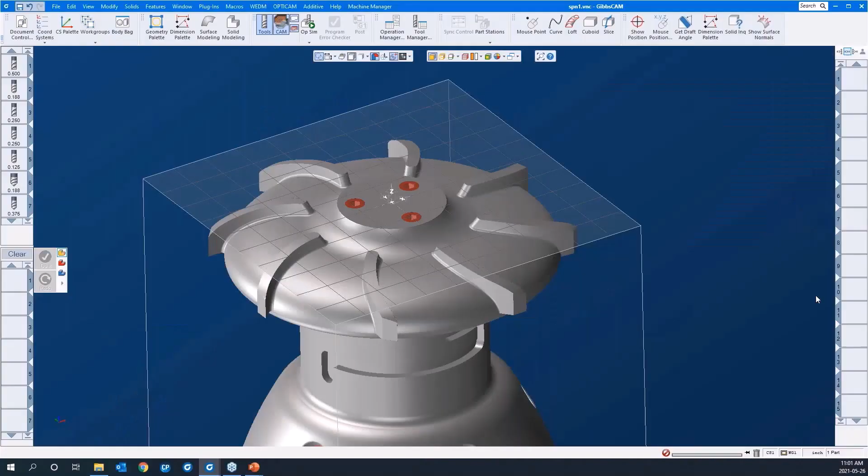Okay, let's get started. We're going to be looking at the 5-axis module today for simultaneous machining in GibbsCAM.

Let's open up a 5-axis process to start. Before I create a toolpath, we'll just look at the process dialog for the 5-axis module.

This is the options tab. It has your speeds and feeds, and you can duplicate and rotate toolpaths, which CS you're going to be machining in. GibbsCAM 5-axis supports 3D cutter radius compensation, so you can adjust the toolpath at the machine for size.

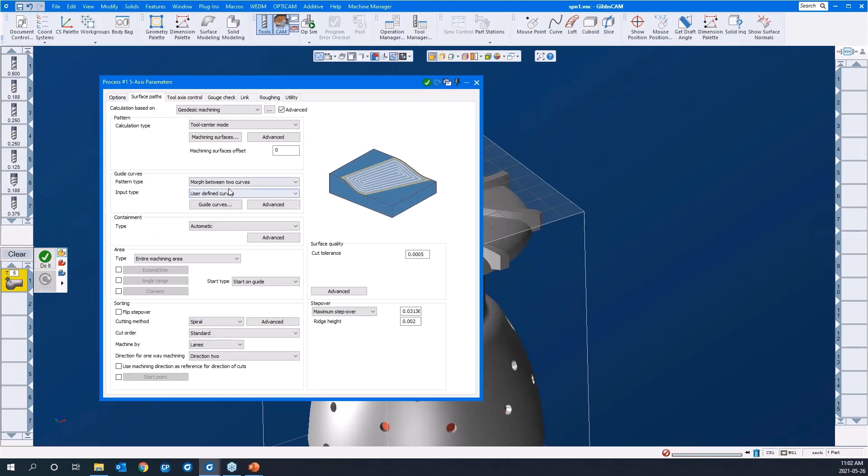If I click on the surface paths, you'll see that GibbsCAM is very graphical in the 5-axis module. Any field I click on, a diagram appears to let you know what the system is expecting. And that's right across the board, almost any field you click on. So it's very graphical, and it's a joy to use.

Okay, you'll notice I'm in tool axis control, and we'll be machining in full 5-axis simultaneous. There's also, you can go 4-axis simultaneous, or you can lock both rotary axes and machine in 3-axis as well, in XYZ. So we'll be looking at that as well.

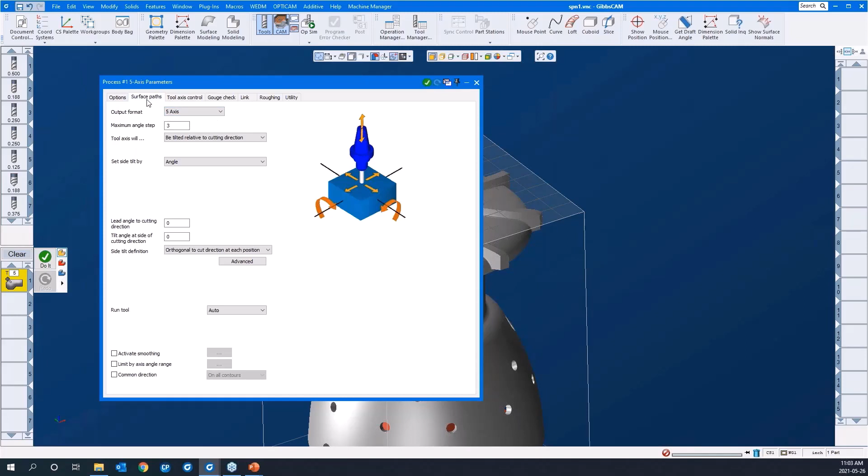There's a lot of power to the 5-axis simultaneous machining strategy in GibbsCAM, and a lot of depth to it. If I go over my calculation, if I'm selecting surfaces, there's a series of sub-options here for different toolpath options.

If I select triangle mesh, you'll see there's another series, a subset of toolpath options. And if I go to wireframe, you'll see likewise. So there's very many options here, okay?

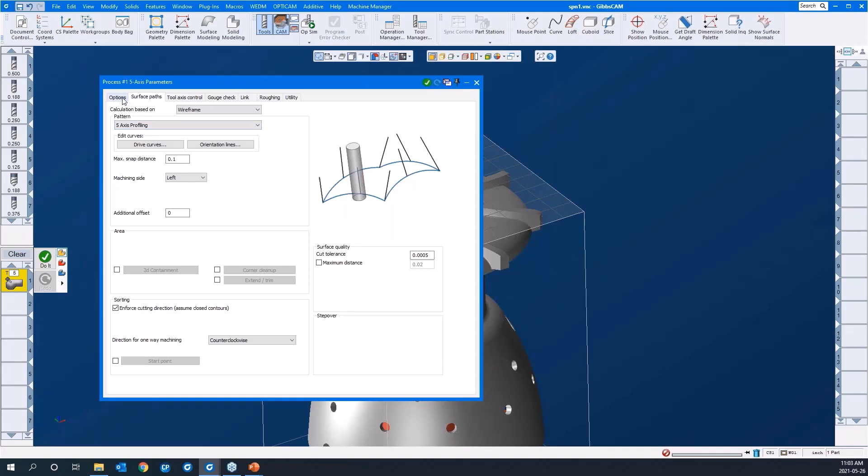And we're going to cover off a few of them here today. If I go back to options, you'll see there's a whole other set of toolpath options here as well. They're pointed 5-axis strategies, and we'll look at least the drilling one today.

Let's go ahead and create a toolpath. Okay, so our options tab is good. We're set like this. I'll go to surface paths, and I'll select surfaces to start.

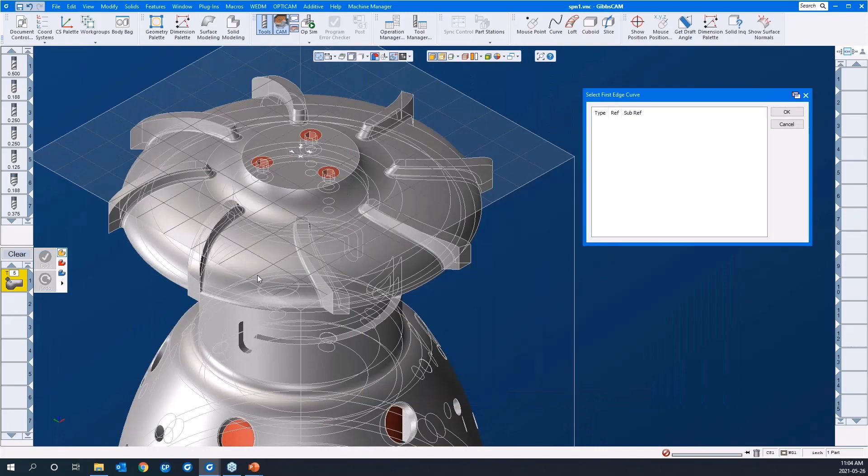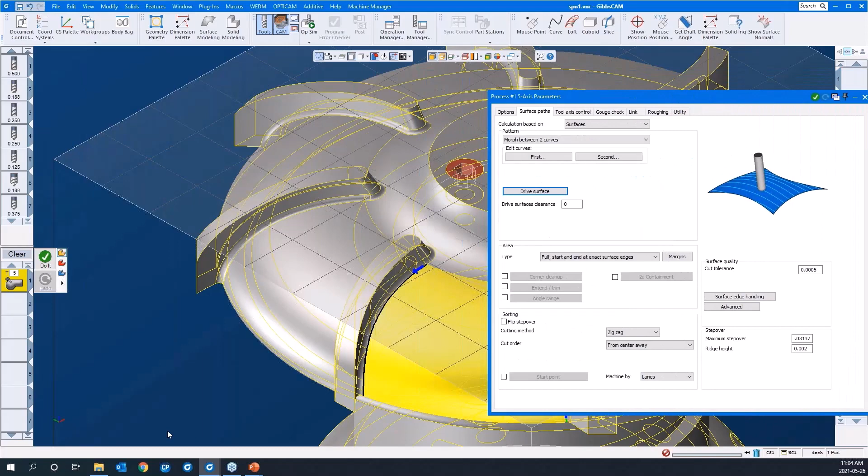We'll go morph between two curves. I'll just select the first curve like so, and I'll say okay. The second curve will be in here. And then the drive surface, the surface we're actually going to be machining, is this one. So those morph curves are containing the toolpath, and we're going to be machining onto the yellow surface here.

Start and end at exact edges, meaning the tool is going to travel right up to these morph curves that we've selected. But if we wanted to shift over, if we did that, it would perhaps overcut.

So we can go to margins and add the internal tool radius, which is the radius of the tool we're using, which is, in this case, an 1/8" ball mill. So that'll shift the toolpath over by that amount.

We're going to cut a zigzag toolpath, and we'll just use a standard. So it'll go from the left or right based on our decisions.

There's the machining tolerance. We'll keep the step over rather coarse while we're developing toolpath. It'll calculate quicker. And once we're happy with the toolpath, we can tighten up our step over to create a nice surface finish.

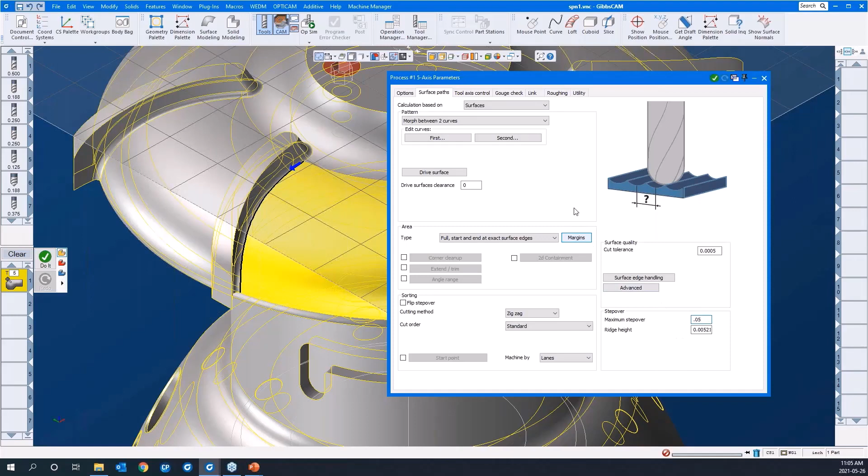In tool axis control, we'll select full 5 here. There's dozens of options to control the tool axis in relation to the surface it's cutting.

By default, the tool axis wants to stay perpendicular to the surface it's cutting. And for many reasons, you can alter that by adding a lead or a lag angle or a side tilt as well. We'll discover them as we go.

In the gouge check, this protects the part from the flutes where required, or the shank of the tool, or the arbor as well. We'll come back and look at that where required.

We only apply gouge check strategies once the toolpath is created typically, and we see that there's a problem when we need the tool to move away from any given feature.

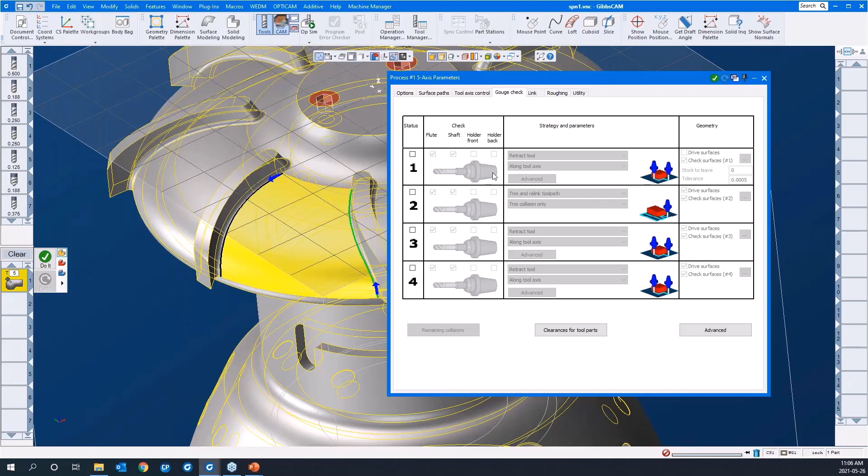The link tab is a very important part of the 5-axis module. These are important components of the toolpath. This is our first entry and last exit, okay? So the lead in and lead out.

Gaps along cut are very important, okay? What is a gap along a cut? Well, this diagram kind of displays that. And so if the system encounters a gap, do you want it to go direct or follow a surface, or it can blend the spline, or it can start retracting to different feed or rapid moves as well, okay?

And then you can differentiate between a small gap and a large gap and have the system behave differently based on those. Another important one is these links between slices. Well, what is a link? A link is the little piece of toolpath that joins the entire process together. So if you have a zigzag toolpath, there's a little piece of toolpath that links it together, and that is called the link as well.

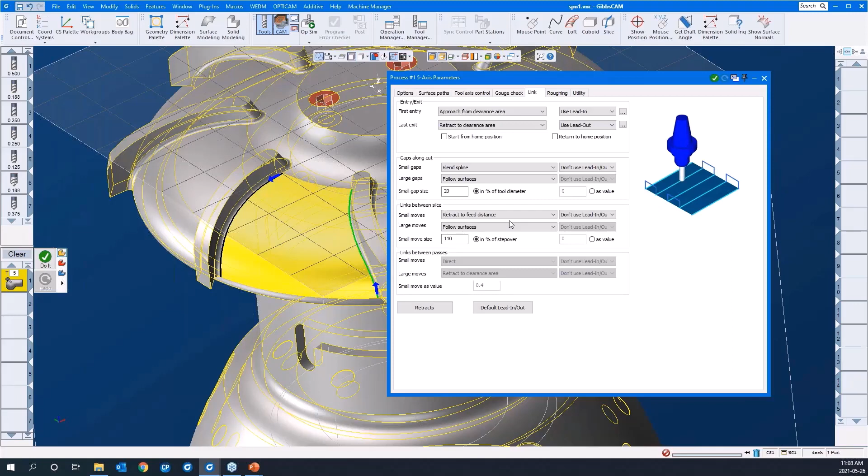So you can go direct if you choose, or again, some of the similar options. If it's a far distance, you can have it retract to a feed distance or a rapid distance, and so on and so forth.

Again, you can differentiate between a small move and a large move. A small move, you may just need to follow the surface, but if it's a longer distance, you may want it to retract to a clearance area.

So there's many different retract options, and they're all defined in here, their depths, okay. There's clearance area, which is the initial clearance plane. There's also a rapid entry and exit, and then a feed entry and exit, and then a rapid distance here as well. We'll explore these as we go forward.

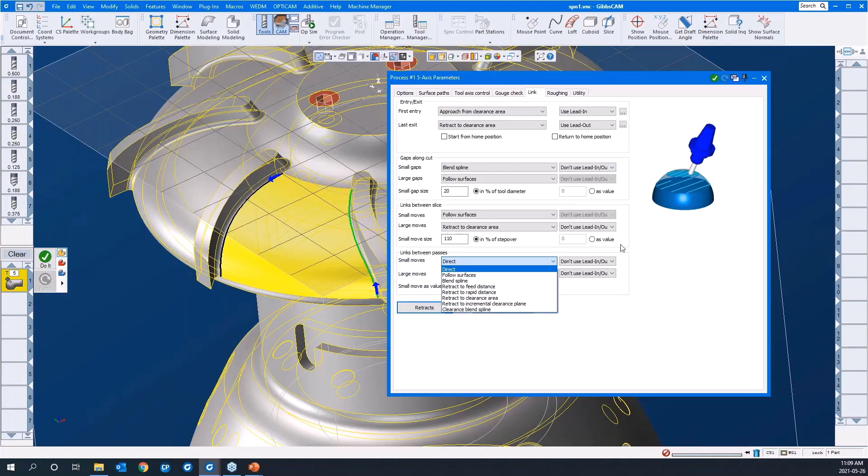There's also a roughing tab. By the way, in the link tab down here, links between passes, you can do multiple passes, and then the same options appear here for how to get the tool from the end of the first pass to the beginning of the second. It's grayed out right now because we don't have any roughing strategy selected. If we come here to roughing and click any one of these, go back to link, you'll see that it wakes this up, and now we can behave. You can see the different pass levels here.

So to create our toolpath, we have our edges selected. We're taking 50 thou step overs. Our tool axis control was full 5. We had no gouge check strategies on. In our link tab, for links between slices, I was just going to say follow surface and follow surface in both instances. Let's go ahead and create that toolpath.

Down here in the lower right is the progress bar. There's a little thumbtack there. I like to keep this open during my session so I can see how long it's taking for toolpaths to calculate.

Okay, so there we are. You can see there's the shift from the edge. That's the internal tool radius. We have a lead in and lead out option selected here, so I can modify those.

If I go to the link tab, yes, we're using lead in and lead out. If I go to my default lead in and lead out, I can modify them here. Vertical tangent arc, I'll make them a little bit bigger like that, and I'll shift it over to the lead out just by clicking that button. I'll say okay, and we'll just hit the redo button.

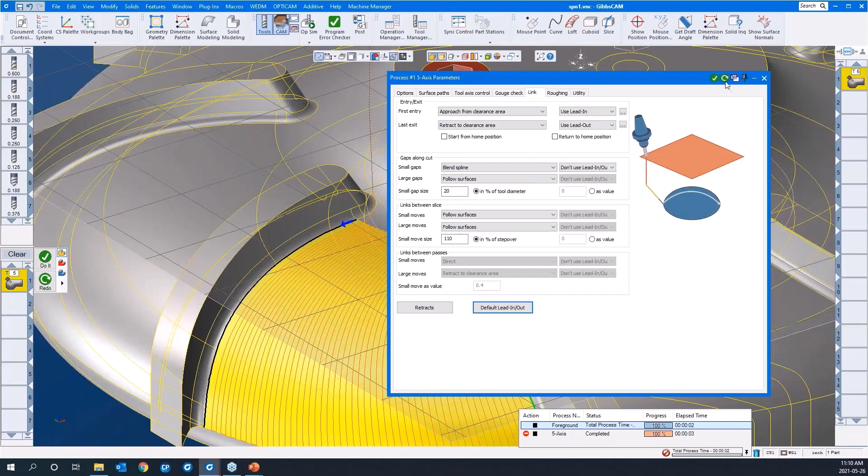Let's run the simulation here and have a look-see. Away we go. Okay, so this is OpSim right here. You can see right out of the gate that it has offended the blade there.

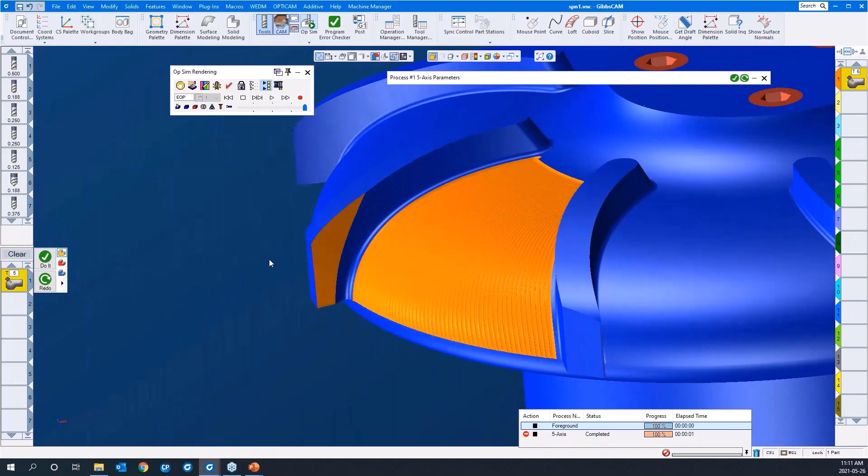And the step overs are rather coarse here. While we develop the toolpath, I'll keep the step overs rather coarse, and then we'll clean them up as we go. We'll see how it behaves coming up to the side of this blade here. Okay, so it seems to be clearing that one. This is our problem right now.

So we'll add a gouge check strategy here. I'll go to gouge check, I'll select it, and check the flute and shaft. There's three main gouge check strategies. The first is retract tool - you can retract the tool along the tool axis, along any of the machine axes, or from any reference point you choose. It's quite versatile that way.

The next main one is you can tilt the tool. You can use a side tilt, which is a tilt angle perpendicular to the travel of the tool, or you can use the lead lag angle, which is along the length of the cut as well. Or you can let GibbsCAM take over and say do automatic. In our case, we'll go side tilt - we're gonna have the tool tilt perpendicular to the direction of cut. The parameters are, you can limit it to a maximum of 90 and minus 90. We'll just leave that as it is.

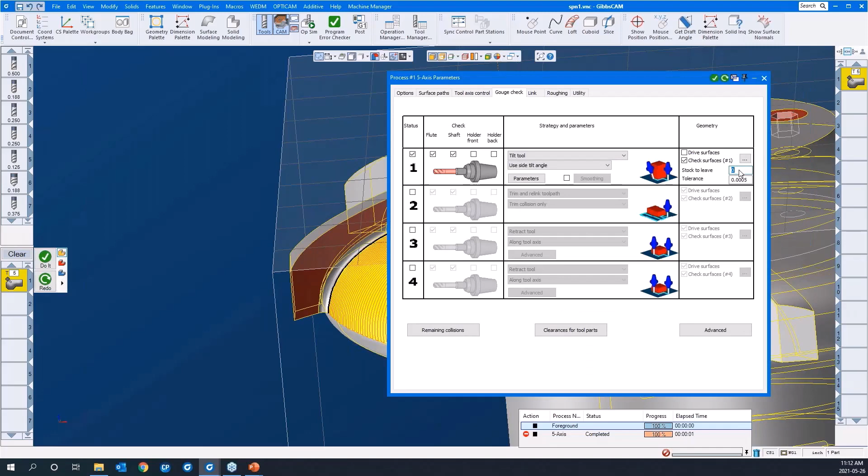What surface are we gonna check? I'll just pick here and select the surface we wanna protect, is that one. We'll say okay. And we'll leave an amount on there - we're gonna have it missed by, we'll say 50 thou. I'll say redo.

And you can see there's a little jog in the toolpath, let's look at the simulation and see how that behaves. I'll slow it down a little bit, hit play. So it comes down and you can see the tool is actually missing there.

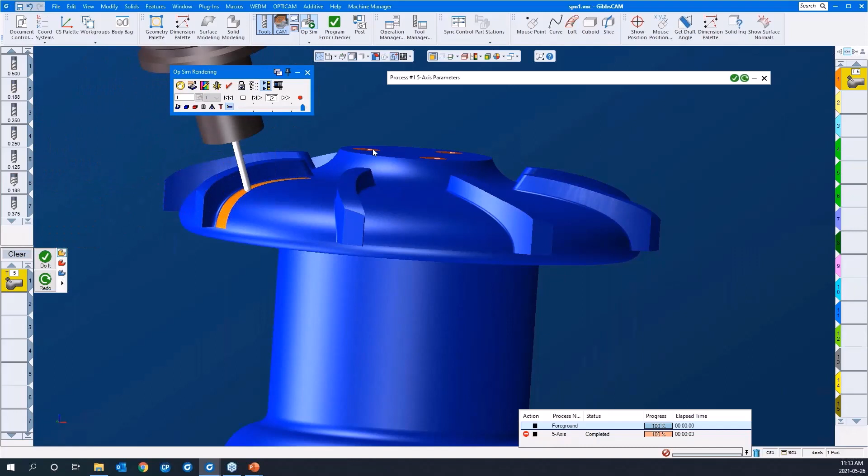Okay, while it's running simulation, you can single block it at any given time. You can put the tool holder on there as well. And as we go through and I show you the 5-axis, I will describe some of the features available in OpSim and in machine simulation as well.

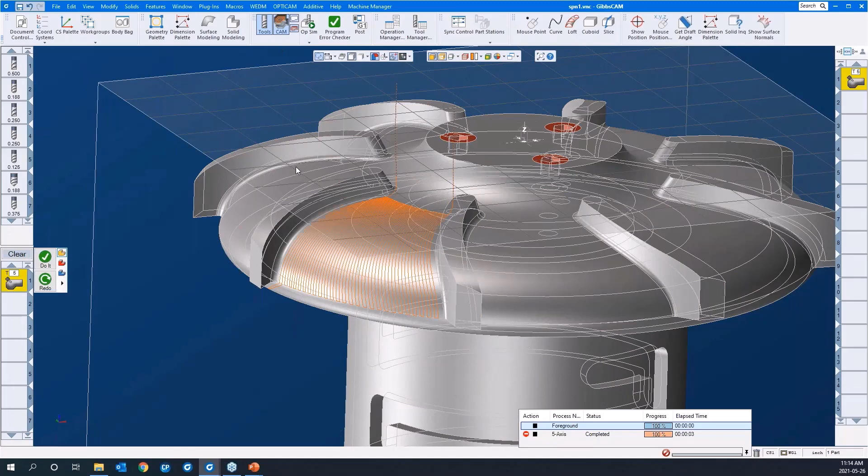Okay, so we're milling with the end of the tool here. A lot of the 5-axis module is end milling, but there's a very important component to 5-axis, and that's side milling - swarf milling they call it, side wall axial relief feed. So let's do that, we will side mill one of the blades here.

Okay, in this last toolpath, I used the edges of the solid to select. You certainly can do that, but you can also use geometry that you have extracted from the solid, and I can do that in this case here. I'll create another 5-axis strategy. I'll use the same tool.

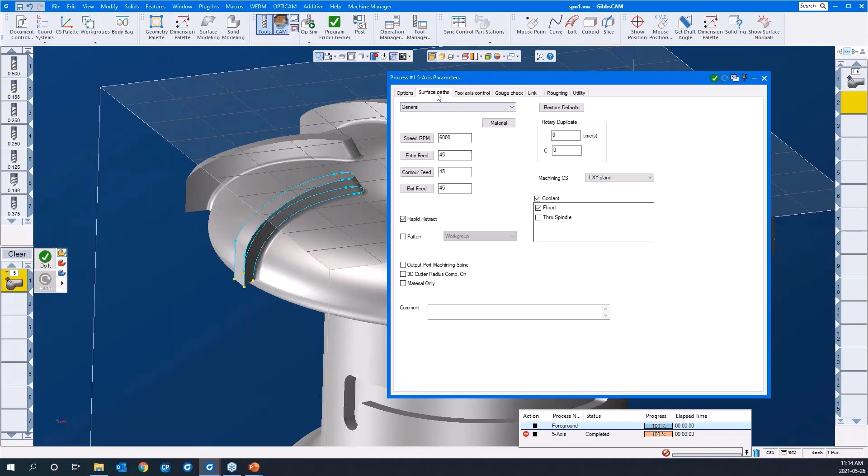Cutter comp is on by default, I'll turn it off until required. Surface paths - this time we're going to go swarf milling. Our swarf surfaces will be the walls of the blade, this one. Like so, I'll say okay to that.

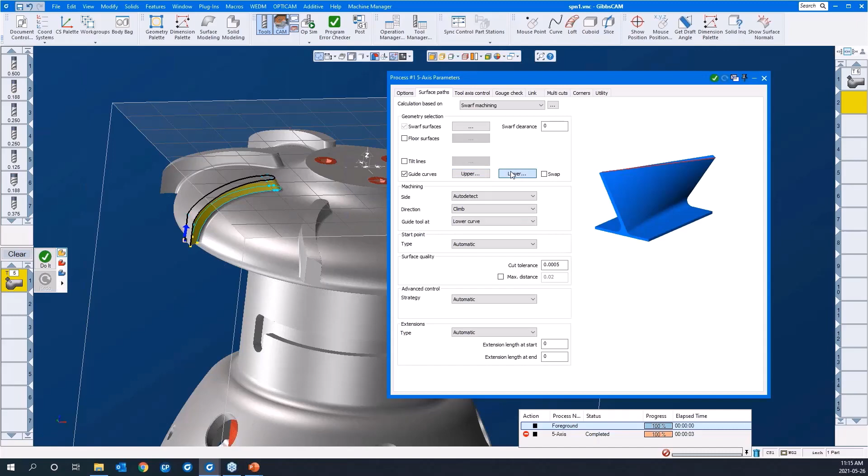We'll use guide curves, which is the geometry. The upper curve will be the one on the top of the blade, and the lower will be this one. Okay, I'll say okay.

The system will auto detect which side of the surface it should cut on. It's going to guide the tool at the lower curve. The start point is predetermined, we can change that. There is our machining tolerances again - that affects the quality of your toolpath.

Advanced control, we can let it go automatic, or in this case we're going to sync the toolpath with the upper and lower curves. We can add an extension on the beginning and end of the toolpath, we'll look at that. Under tool axis control, full 5, yes. Gouge check, we'll just leave it as it is - it's going to check the guide curves already.

Okay, there's a lead in and lead out already defined here. We can remove them. If we remove them and say no lead in, lead out, you'll get an axial entry and exit, just a straight line in. And you can do it in multiple passes - we're going to do it in one pass here. I'm going to say do it.

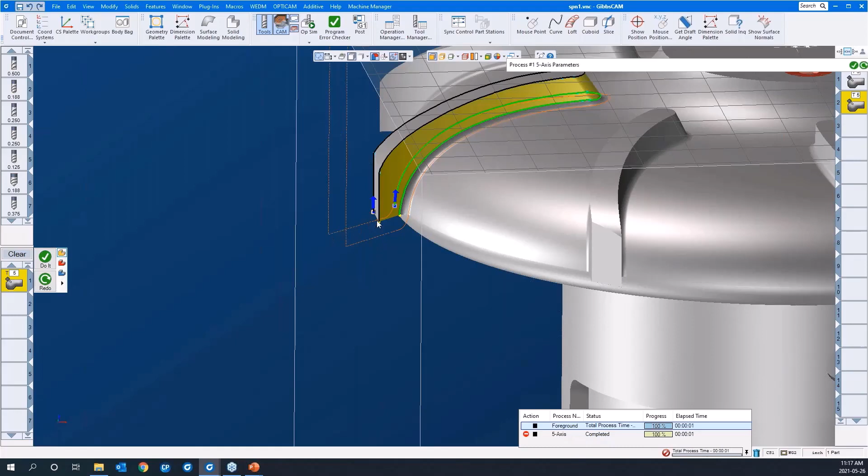Like so. There's a clue when you're developing 5-axis toolpaths on the entry and exit line, these lines right here. With a bit of practice, you'll understand that this represents the axis of the tool, so it gives you a clue as how the toolpath is going to approach and leave the cut.

Let's have a look at this one. I'll just turn off the holder - sometimes it's nice to have it, other times it might impede your view a little bit. Something like that.

Okay, you may consider extending the toolpath a little bit here. I'll go back to surface paths, extensions, the start and end. I'll just extend it by, we'll say 50 thou at the beginning, and that same 50 thou at the end. I'll just say redo - you can see the difference there.

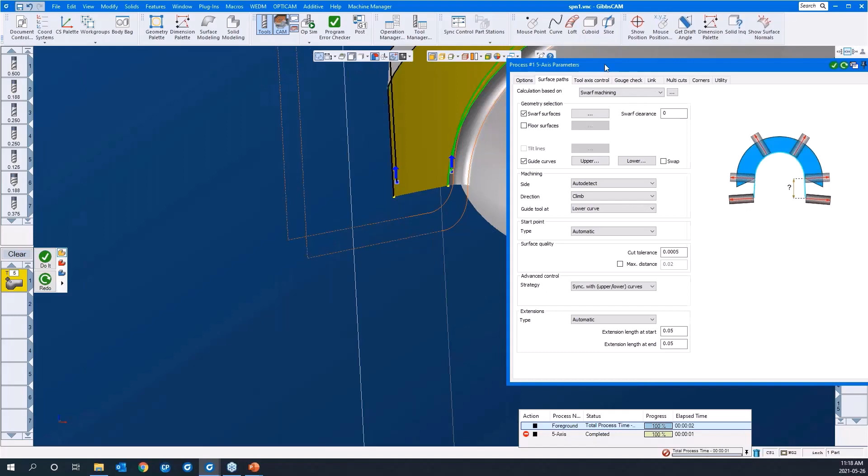Okay, at any time, and I'll do it on the next toolpath, you can duplicate and rotate that around. There's no need to go around to each blade and do them separately. You do one and then you copy, rotate it around, like in other environments in GibbsCAM.

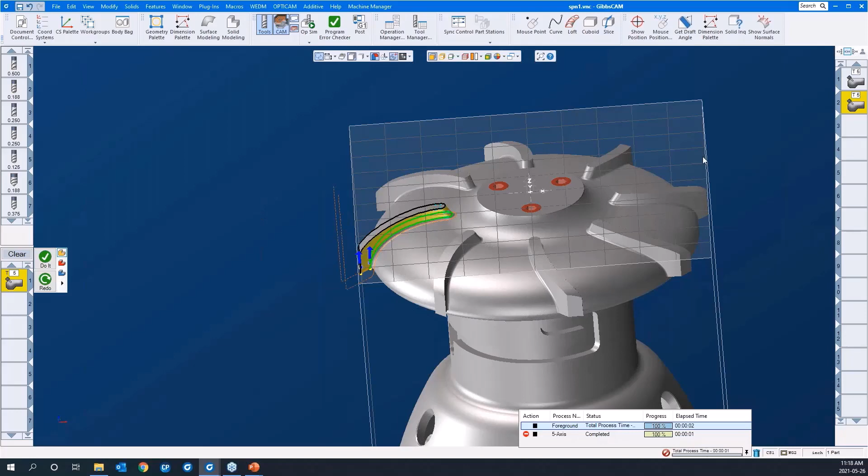Okay, let's go back to Op1. We were saying that it's a full 5-axis strategy, absolutely no problem, but you can also lock a rotary axis, or lock 2.

Okay, so let's look at reusing the data that we did for Op1 to cut the top of the blades. To simplify my view here, I can turn off the grid and the stock cube here. Let's go in and modify the data in this process dialog to do some 3-axis milling. It's basically going to be a 3D toolpath option, XYZ.

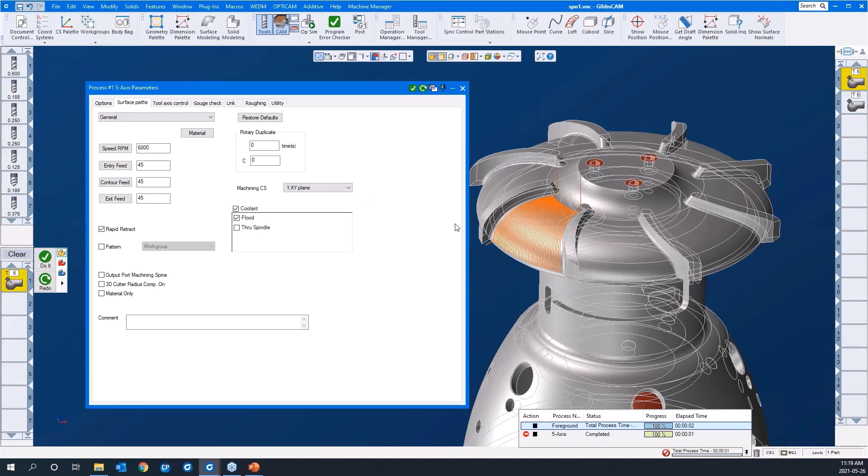I'll go to surface paths, and we'll select morph between 2 curves. Yes, the first curve will be this, and I'm picking wireframe from the solid again. The second curve, this one. Like so.

The drive surface, or surfaces in this case, will be these 2. We'll start and end at exact surface edges, except this time I'll remove this margin option so that the tool does go right to the edge and doesn't stay off it by the radius of the tool.

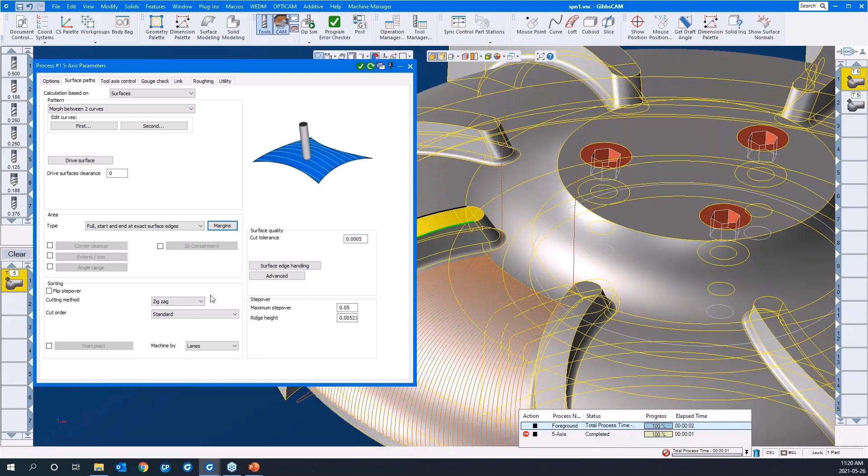I'll say okay there. We're zigzag machining. I'll set the step over to 25 thou. Okay, so you can do it by step over or by ridge height for surface finish considerations there. One drives the other.

If we go to tool axis control, we're going to take it down to 3-axis. If that's the case, you can machine from the XY plane, or if you click other direction and you have a coordinate system created, you can pick the CS that you want the tool to approach from and cut on using this one. So in effect, it's 3+2 machining or 5-axis positional milling. We're going to go by the top, which is the XY plane or CS number 1.

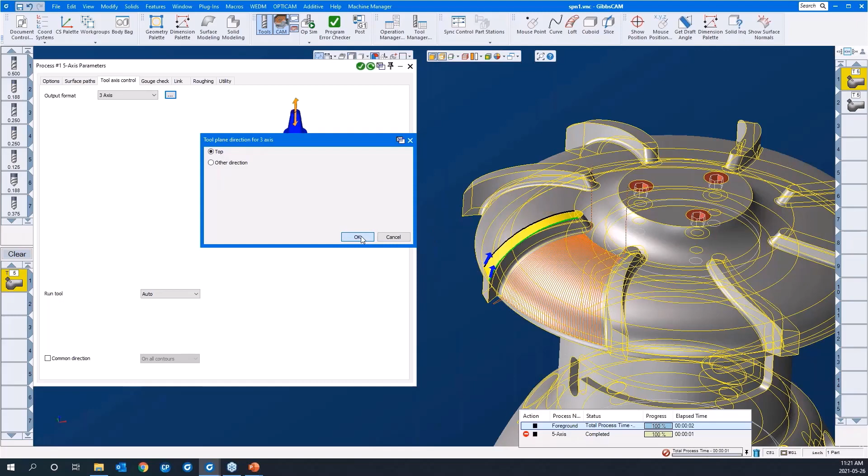Gouge check. Until we need it, I will turn it off. The link tab, again, we'll leave them as is. We'll create the toolpath and come back and modify as required. At this point, I'm going to create the toolpath. I can watch it run here in my progress bar. It ran rather quickly. And you can see our toolpath here. First of all, you see that the tool is now exactly on the edge.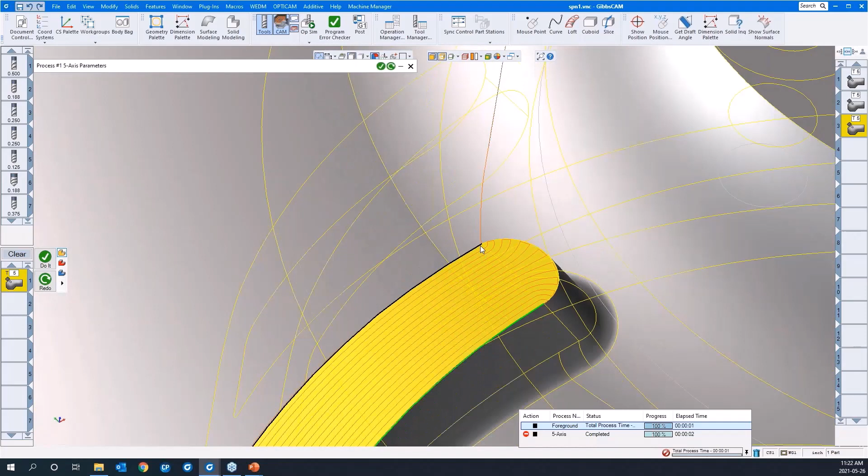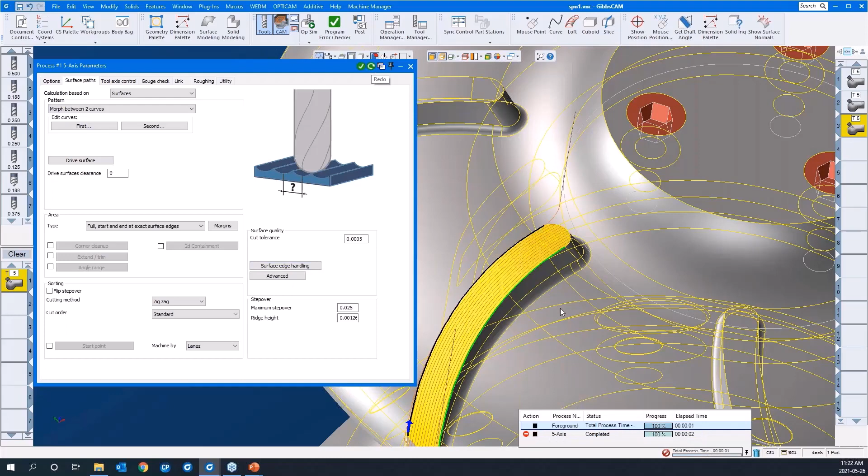Okay. I see a problem here where once the toolpath leaves the containment of these morph curves, the toolpath starts to flare out like that. So what we can do is we can virtually extend the morph curves to the end of the selected surfaces. So if I go to surface paths and surface edge handling, extend edge curve, and I'll say okay, and say redo. Okay, so that straightens that up pretty nice. If I go to a top view, we'll get a good look at that.

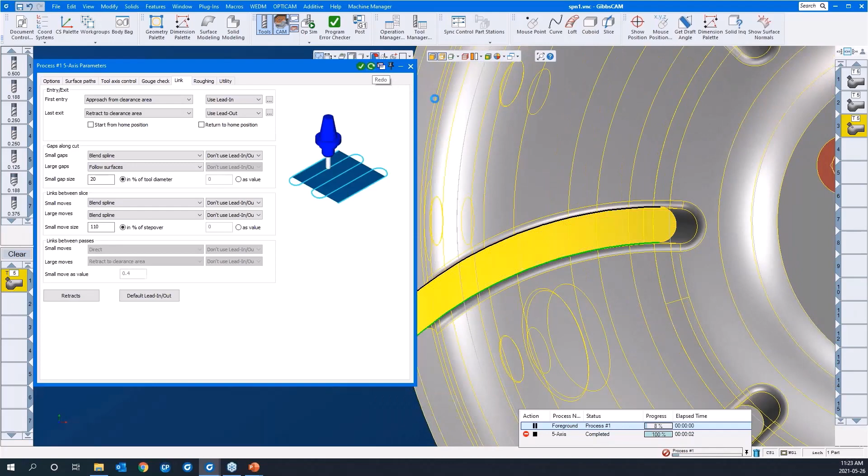Some other improvements: these are the links we were talking about. They're important components of the toolpath. And you can see that there's an abrupt change of direction there. So we would rather, where possible, have a nice blended curve in there. So if we go to the link tab, and knowing that there are links between slices, instead of following the surface exactly, we'll say blend spline in all cases in this toolpath. I'll say redo. You'll get a nice rounded curve there.

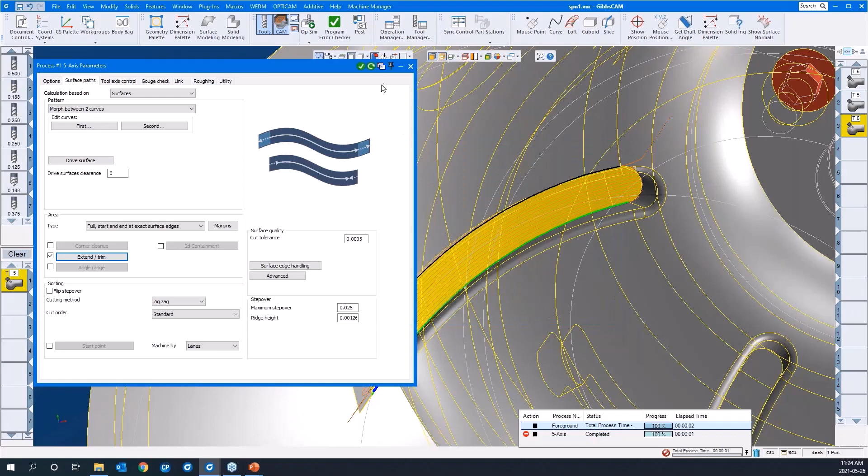One last thing you could do if you wanted, just for safety's sake, is have the toolpath push out beyond the surface. In surface paths, you can come to trim extend, and I'll extend the stroke of the toolpath. This is along the stroke. This is across the sides. Along the stroke, I'll extend it by 25 thou on both ends. And say redo. Okay, so it just pushes it out there a little bit. I'll go to a nice ISO view.

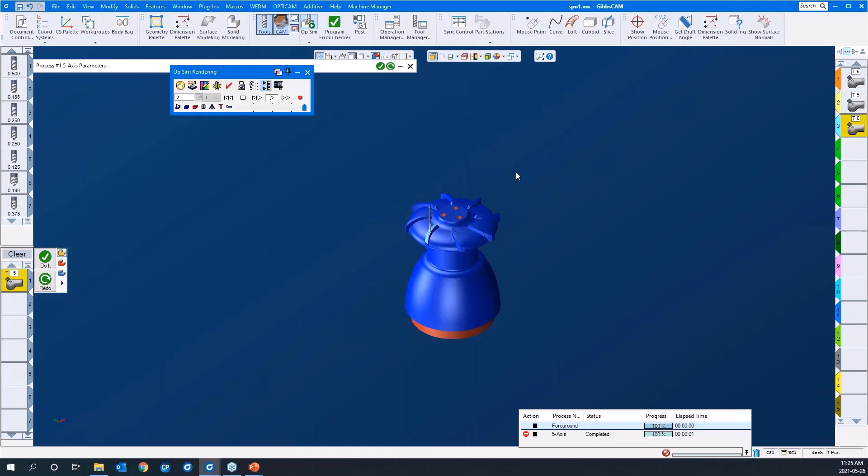One more thing we can do here is I'll go back to the options tab, and we can duplicate this toolpath 7 times over 45 degrees and say redo. Like so. I'll just run the simulation again. And hit play. Away it goes. Of course, I would do that at the end to all of our operations so that the entire part was cut. Okay. I'll turn off edges here.

So we've been creating toolpaths from scratch here. We've been building them up. In GibbsCAM, we have the ability to save these processes off. We can save all of the manufacturing data in here, your speeds and feeds, the different toolpath parameters. It also saves the tool off. So it's suitable for similar parts. So if we were cutting similar parts, we could have a series of processes available for that. Okay, so we're going to use those and it'll just speed up our toolpath creation.

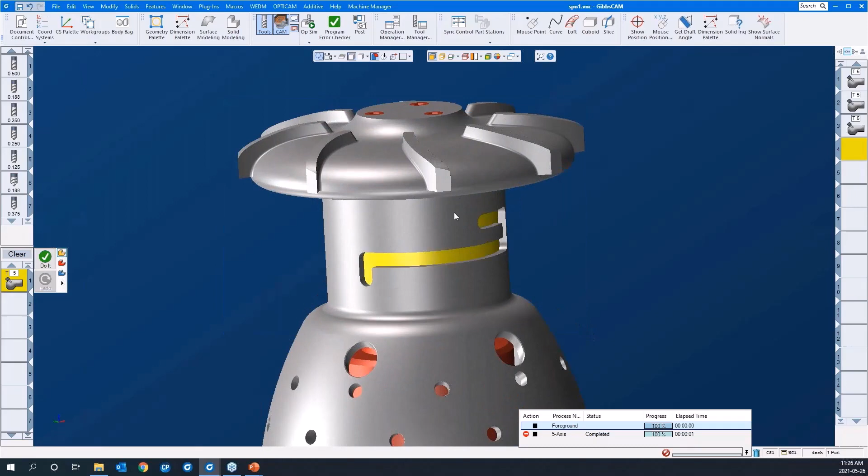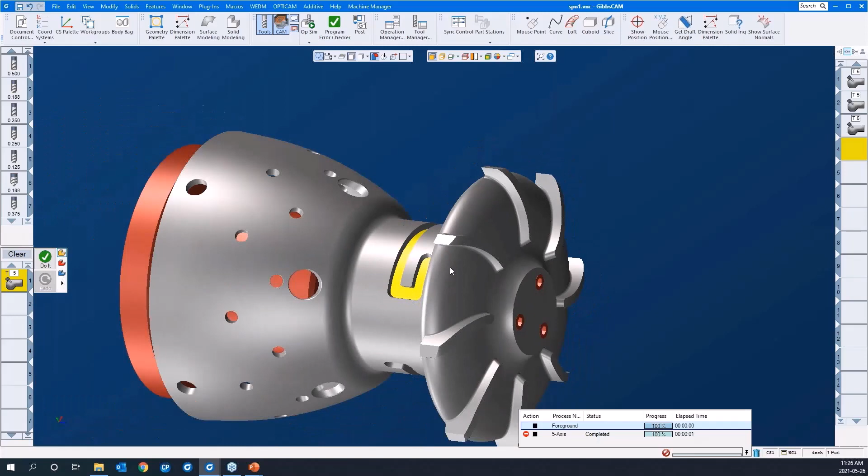Okay, we're going to look at this radial slot here. This is a 5-axis machine. It has full 5-axis on it. However, if we were to rotate the part along the trunnion axis 90 degrees and access this slot, in a sense, we're now on a 4-axis mill. Although this is 5-axis, this certainly can be done on your 5-axis or your 4-axis vertical mill or horizontal for that matter.

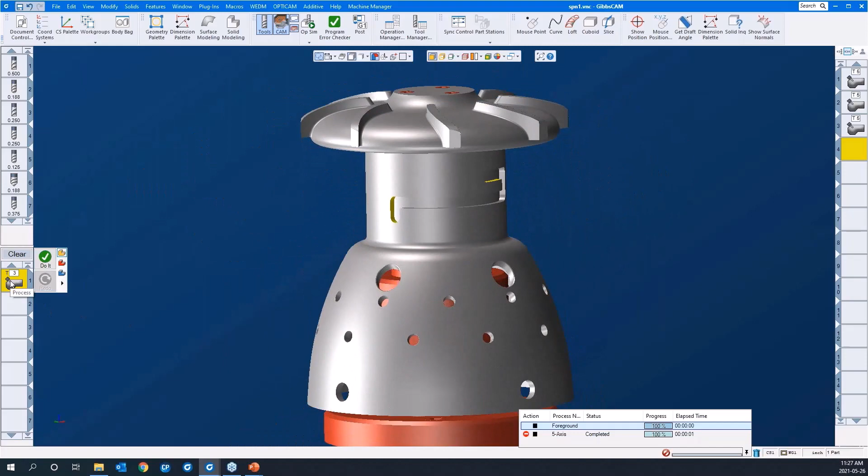Okay, so I'll load a saved process. I'll go load process. And I have one here called multi-axis rough. We'll let it load up. It's using T3, tool 3, which is a 1/4-inch end mill to cut this feature. We can measure the width of this slot rather quickly. I'll just measure across the width of the slot, and the slot's 3/8. So our 1/4-inch tool should fit the bill for a very quick and effective roughing strategy here for some of our 4-axis work.

We'll set our speeds and feeds. I'll go to surface paths. Okay, we're multi-axis machining here. We're roughing, which is interesting. And one of the many options within the 5-axis module is offset milling, which is typical roughing. It also supports adaptive roughing, with all the high-speed machining ability of other high-speed machining strategies, such as all the curves and the corners and the micro lifts. So you can do some effective roughing. In this case, we'll stick with offset milling.

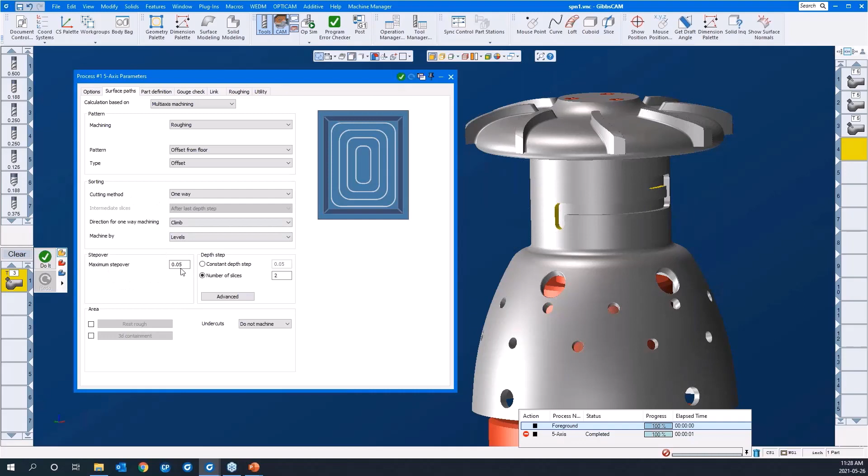We're going to cut one way. We're going to climb mill. The step over will be 50 thou, we'll say. Number of passes, 2.

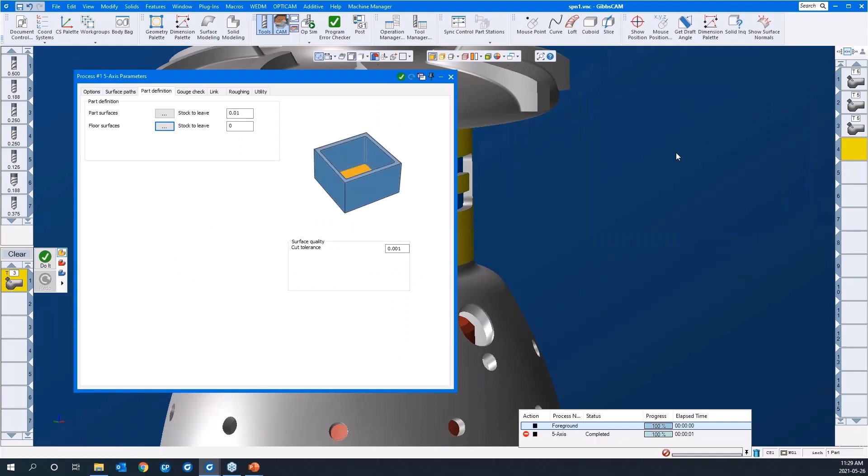Okay, let's define the part. The part surface will be the cylinder that we're cutting. Okay, that defines the boundary of the feature we're cutting. I'll say okay. We're going to leave 10 thou on all surfaces there. Our floor surface, I'll pick it and say okay. Gouge check where required, link tab.

Okay, we're going to have to gain entry to this slot. So we'll use a helical ramp in. Okay, so before I define what gets ramped in, I'll go to the roughing tab. We'll use helical. We'll say a 2-degree ramp angle, and we'll use 25. The ramp or the helical diameter will be 25% of the diameter of the tool we're using.

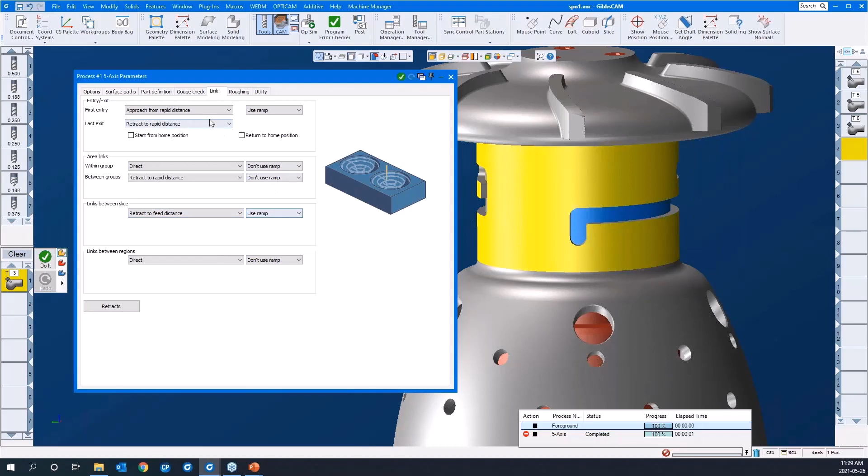Knowing that there's 2 Z depths or 2 passes that it's going to have to cut. The initial cut depth, we're going to use that ramp, yes, and links between slices or passes here, we're also going to use the ramp. I'm going to say do it. Okay.

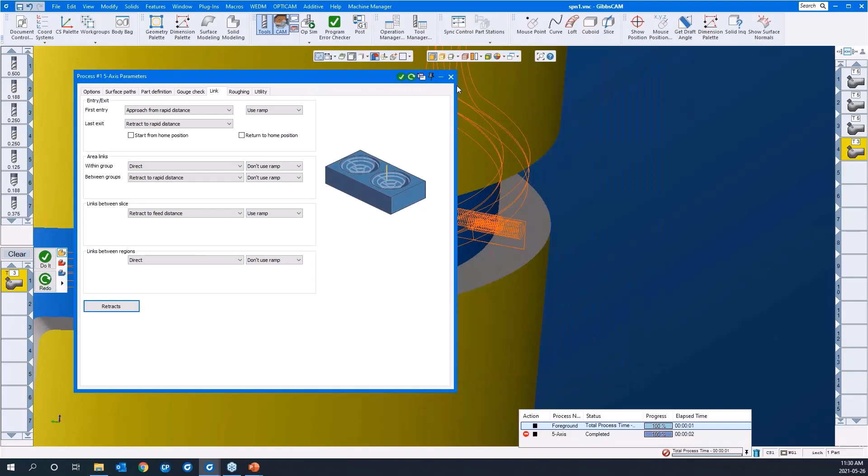So it's using the ramp, and then these distances, we want to keep them pretty tight. The initial one's using the rapid distance, and this is using the feed distance. So I'm just going to make sure that they are close to the part, but still clear. Okay, I'll create a finishing cycle here, and then we'll run these 2 operations in simulation.

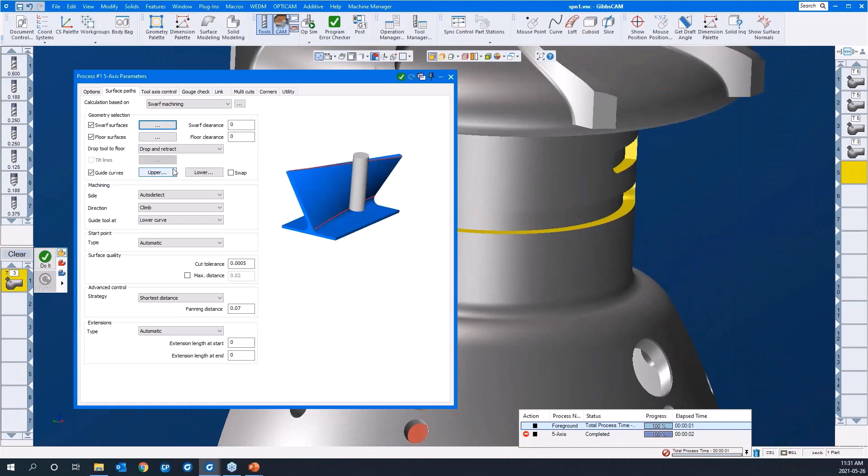So like we did 5-axis swarfing, we can do 4-axis swarfing here as well. I'll swarf the slot with a 4-axis process here. I'll go to surface paths. The swarf surfaces will be the walls of the slot. I'll go select tangent faces and say okay. Floor surfaces, yes.

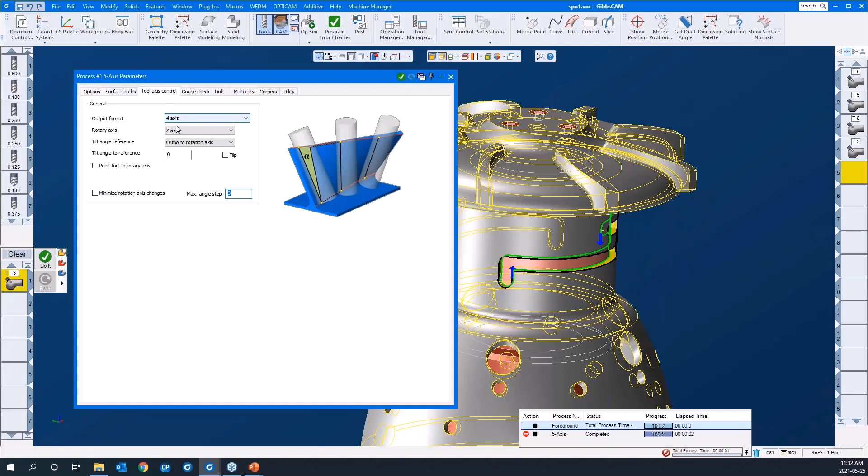And then guide curves. For that, I'll turn my edges on. My upper curve. The lower curve. Okay. In this case, we'll go advanced control. Instead of syncing them, we'll go shortest distance here. Tool axis control, 4th axis. When you select the 4 axis, then you have to tell it where the rotary axis is, and it's along the Z axis of the part, so we're good there.

Okay, this is going to go off center Y. And that's a big question when you're doing 4-axis milling. Of course, the 5-axis module supports off-center Y machining. If you wanted something more like polar and cylindrical, where the tool always pointed to center, the button for that is right here. If you clicked on that, it wouldn't effectively machine this feature.

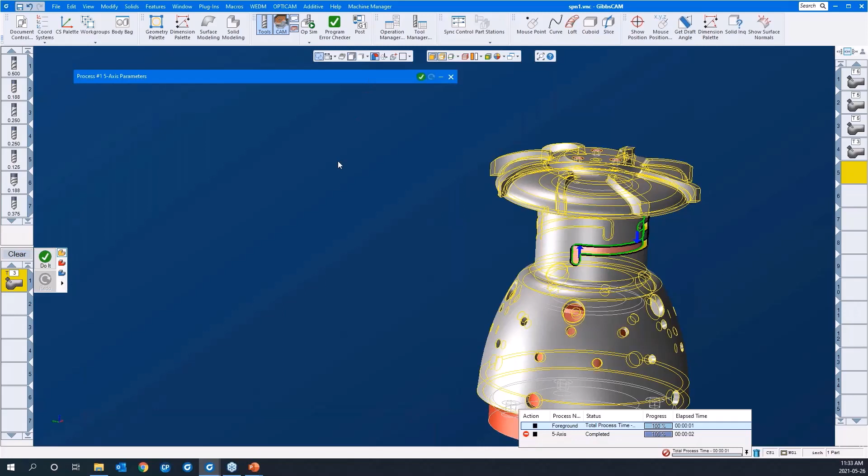Multi-cuts. This is a finishing pass. We're going to do it in one shot. And we just want to make sure there's an effective lead in and lead out here. So yes, we're going to use them. We'll go with a horizontal tangent arc, and I'll copy that over to the lead out and say okay. I'll create this toolpath. Okay. Let's run both of those in sim mode.

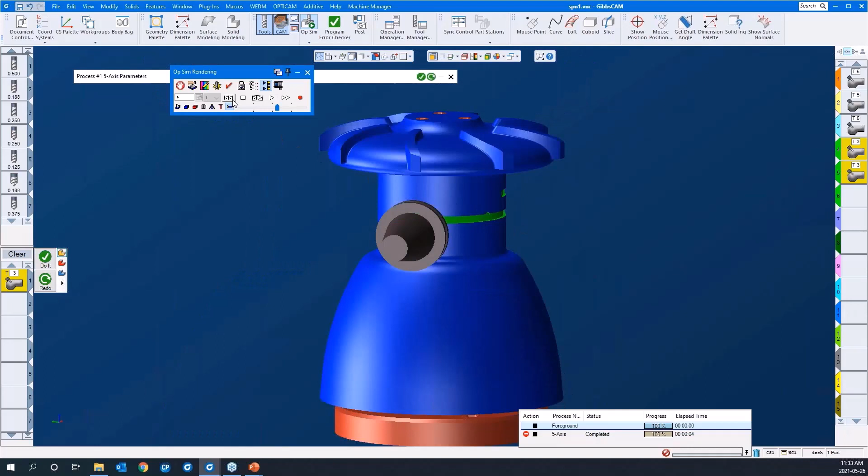Okay, so as you see right now, when I run opsim, the tool rotates and the part stays fixed, something like that. I'll put the holder in and hit play. So it's helixing in to depth here, okay? So you see that happening. If you want a more realistic view of how it's going to appear at the machine, you can change the POV lock here from fixed part to machine.

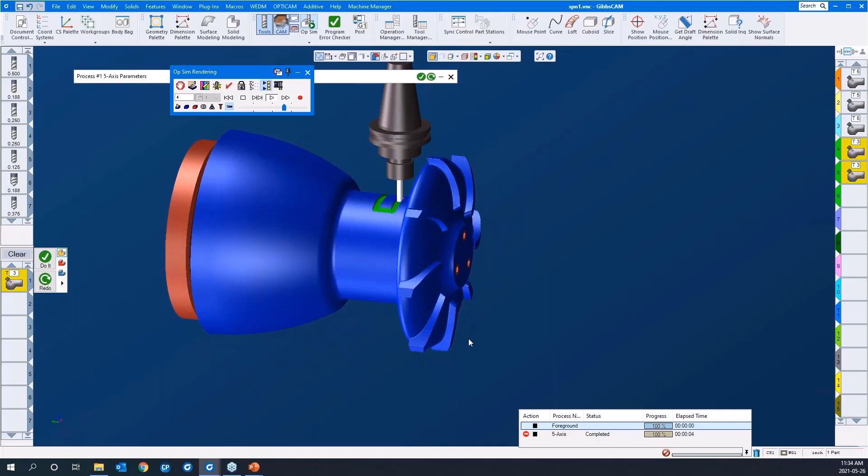Okay, and then we'll run it again, and now the tool will remain fixed and the part will rotate. There it goes. Okay, at any given time, there's a show position dialog in opsim that's kind of interesting. You can click on this, and there's sliders to control. I can lift the tool manually in Z, lift it up out of there.

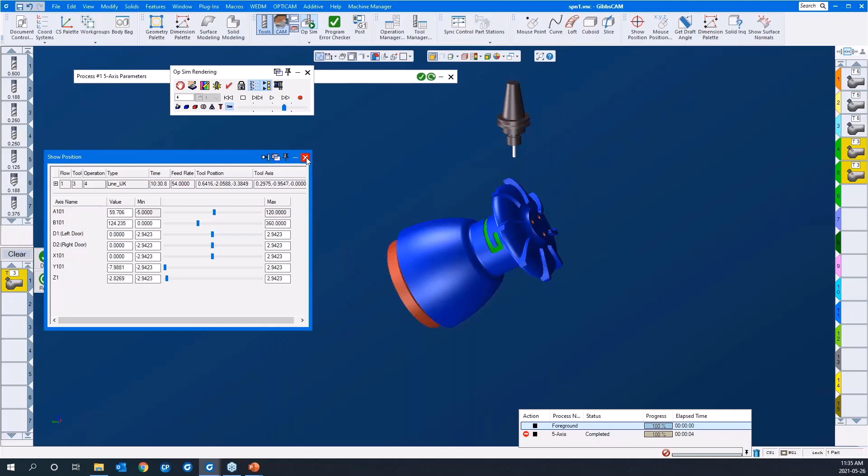And then I can determine my B axis is the rotary axis, and the A axis is the tilt or trunnion axis here. Okay, while we're doing all this, there's full collision checking, okay? If the tool rapids into any material, that's considered a crash. If the tool holder touches anything, that's also considered a crash, and the simulation will warn you, okay? So in the next toolpath, we'll have a look-see, and we'll use not operation sim or opsim, we'll use machine sim.

Okay, let's get ready to create a new toolpath here. I'll turn off my edges again. So we're going to do some 5-axis drilling, these holes here. We know nothing about them right now. We can just study the solid. So in combination with the 5-axis module, we can use the hole manager.

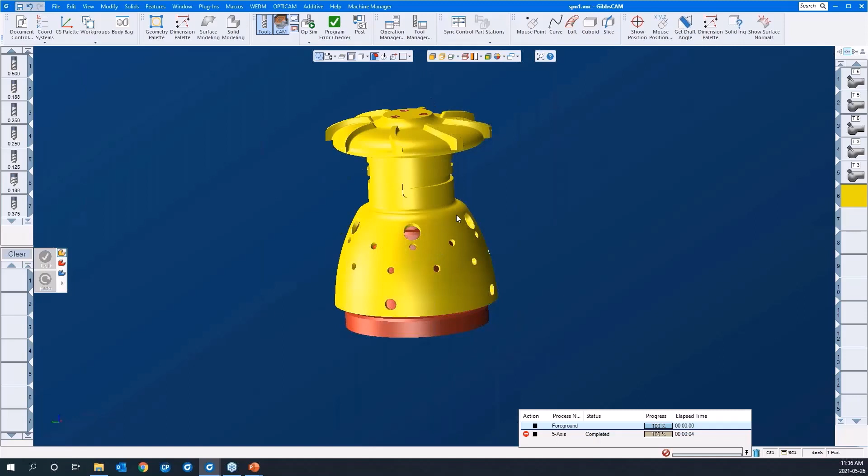So I'll select the entire model. And I'll run the hole manager here, turn it on. And we'll run auto feature recognition and give it a moment to go through the model. Okay, and it's identified them all. There's a hole feature for every hole now. Some of you who use GibbsCAM may already use this feature. We're gonna use it in combination with the 5-axis drilling.

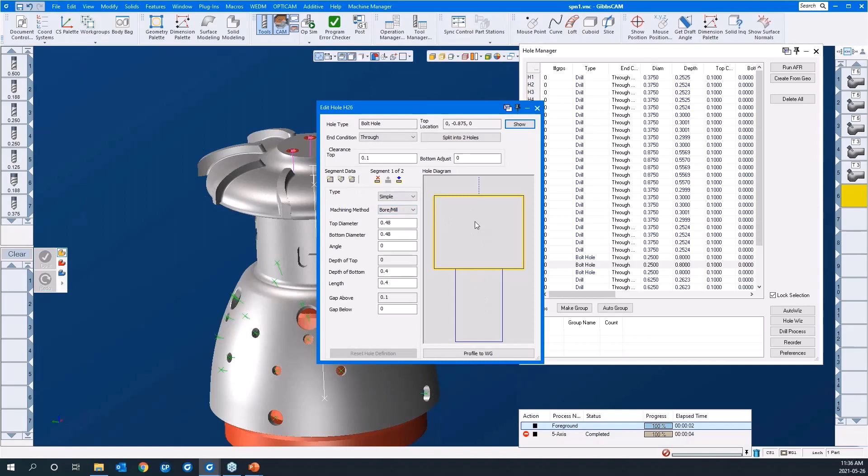If you wanna find out about something, you just click on it, and it tells you right here, this one's a bolt hole. If you want some specific data about it, you can right click on it and go edit hole. You can see it's built from 2 segments. They call it a bolt hole, or a counterbore hole. There's a series of other ones in here. We can group them together now and then toolpath them all at one time.

So I'm going to group them by diameter. So I'll select, let's see, I'll grab this 3/8 hole and the rest of them. And I'll say make group. I'll just give it a name, something descriptive, something like that.

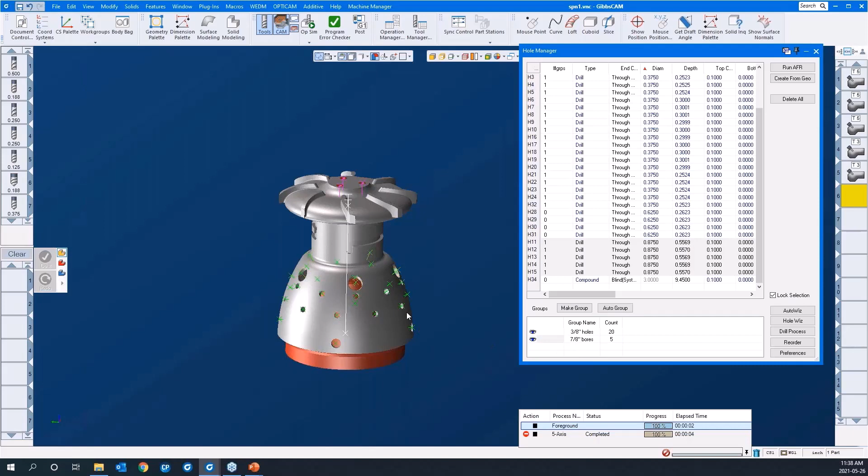What about these ones here? There's these bigger holes here. You can pick on them. Diameter 875, so they're 7/8 diameter. I see 5 of them that are the same. So I'm going to group them as well. Give them a name. Okay, so we're all set to go. When you need to select them, you just pick them by group. They all highlight. So we're good to go.

I'm going to build up a process, grab it from our saved processes. I'll go with helix bore. So all of the drilling options that are available in the drilling process in GibbsCAM are available in 5-axis drilling as well. Under drilling options, we have drill, mill bore, tap, rigid tap, your pecking options, and so forth. We're going to go helix bore in this one.

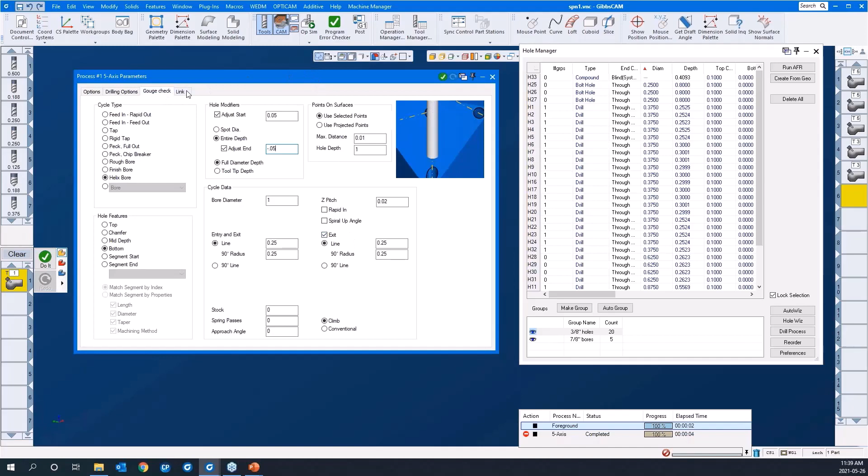We're machining from the feature, so we'll be using the data in here. We want to concern ourselves with the bottom of that hole because we want the tool to break through the bottom. So there's some modifiers here. We're going to adjust so that the tool starts 50 thou above the feature and the entire depth breaks through the bottom by this amount to full diameter depth. There's gouge check and a link tab as well. Let's create the toolpath and see if they're required.

I'll pick the 7/8 inch bores like so and say do it. It's as simple as that. It doesn't create a coordinate system. When we get to the drilling, it'll support drilling cycles as well. I'll do another one here. I'll go load process list and I'll peck drill those 3/8 inch holes.

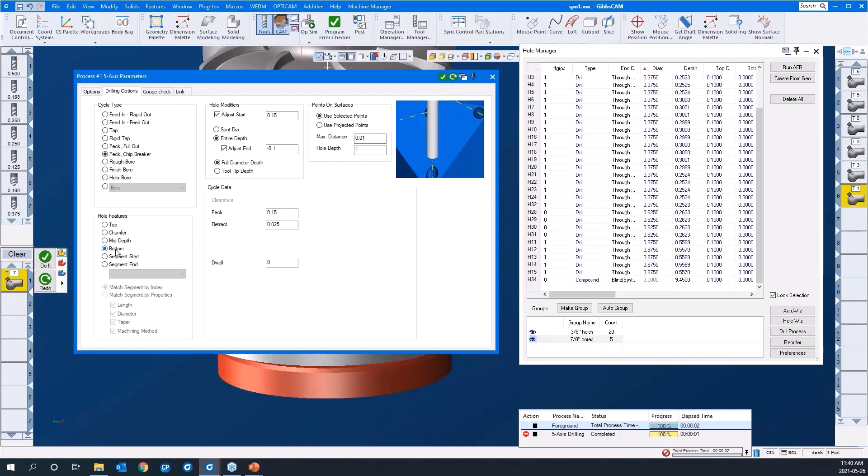Let's have a look here. In this case, we're peck chip breaking. We're going to peck in by 0.15 inch, retract 25 thou. Again, we're going to make sure the tool drills through the bottom of the feature. There's an adjustment here as well. I'll select the 3/8 holes and say do it. So there it is. Done in seconds, really.

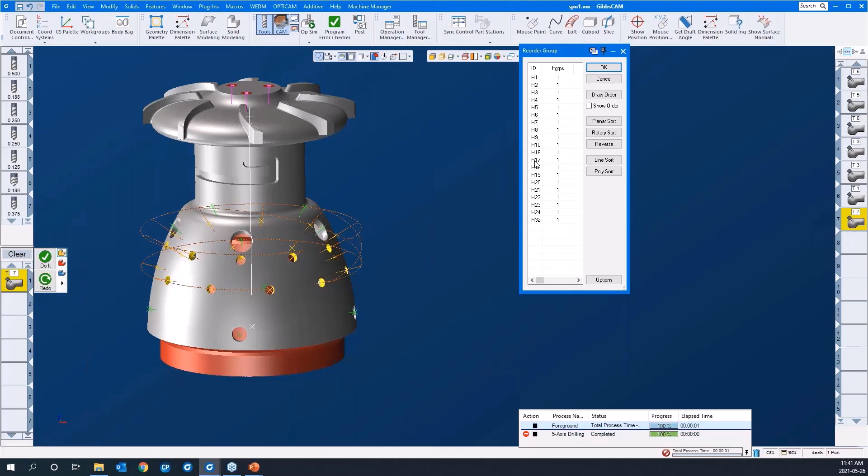You can see without running the simulation that the tool seems to be moving around quite a bit from hole to hole. There's not a lot of order in that. So we can reorder the group. Right now this is the order they're being done, basically chronological order. You can show the label of the features like that. But what we want to do is reorder them.

So I'm going to use a rotary sort because we're rotating the part to drill these. We'll prefer a rotary direction. We'll go clockwise. We're going to sort it around the depth axis and say do it. You can see where it has reordered them here. I'll say okay, and we'll redo it. Now you can see only one shift before it gets to the lower ones.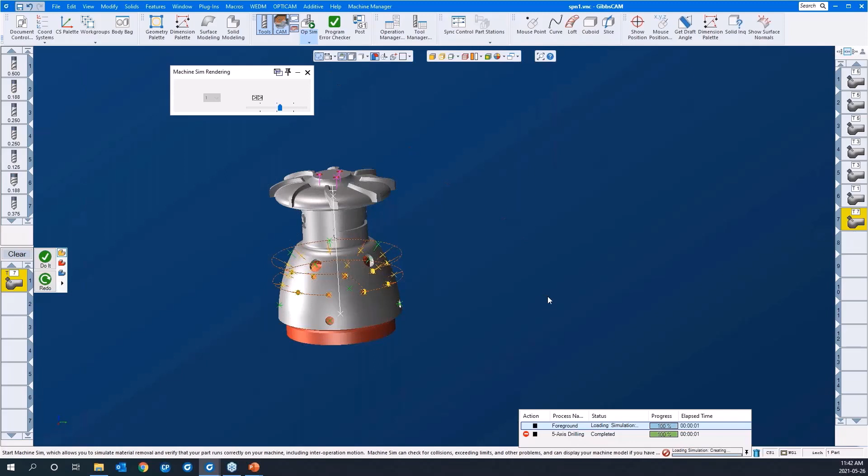So let's run that. I'll just close off the hole manager, and instead of OpSim, we'll go to machine sim here. I'll put selected ops on and hit rewind. It's getting ahead of me. There we go. I'll hit rewind. It'll reset the machine up. And I'll hit single block, I'll slow it down a little bit. And away we go.

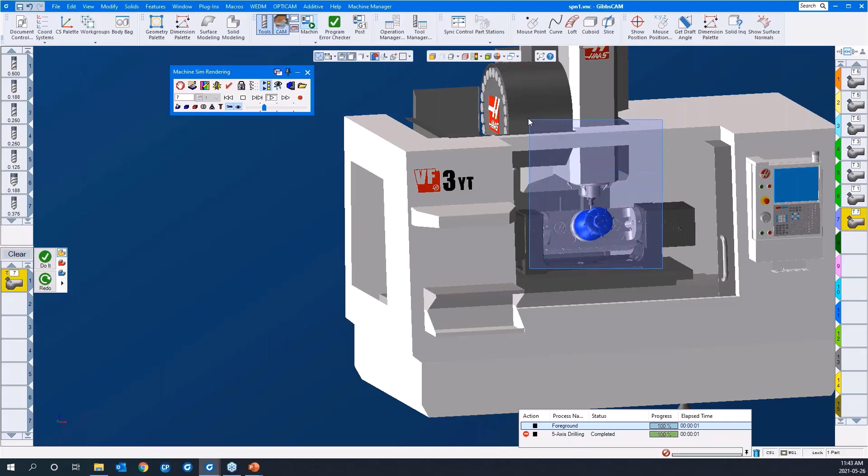So that collision checking we were talking about in OpSim is also available here, except it's checking much, much more. It checks the spindle against any component or the coolant nozzles. It checks it all.

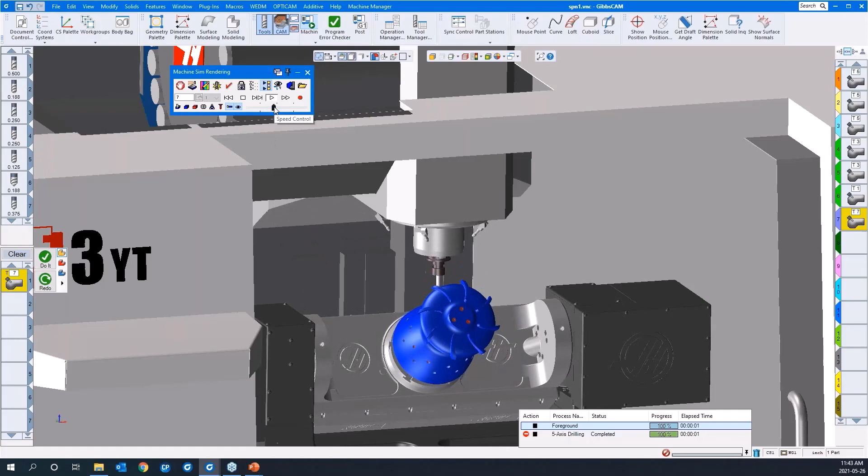Like that. If I turn off selected ops, meaning run all of the operations, now I can just kind of let that get going here and you'll see that it pops out. Yeah, like that.

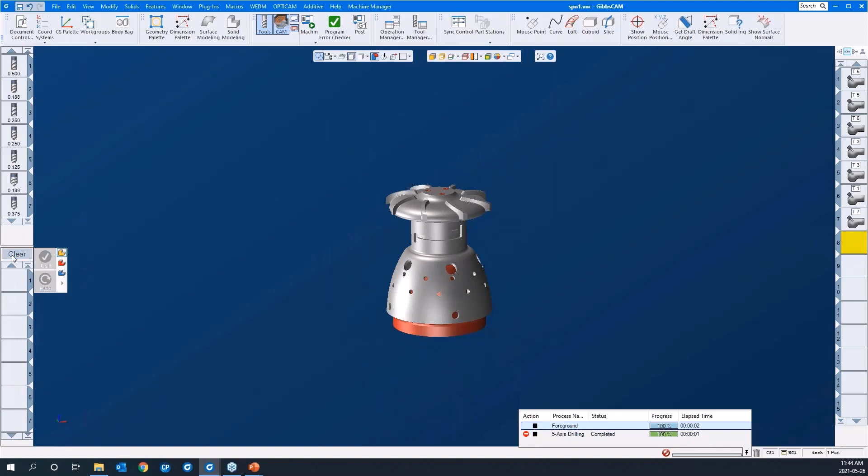Okay, there's a couple other toolpaths I'd like to show you. If you want, you'll keep these hole features, but along the floating taskbar, you can just turn them off so that they're not visible. There's 5-axis deburring, automatic 5-axis deburring in the 5-axis module. Let's just have a look at that. I can pick the entire solid and have it go at it and then exclude edges or what have you.

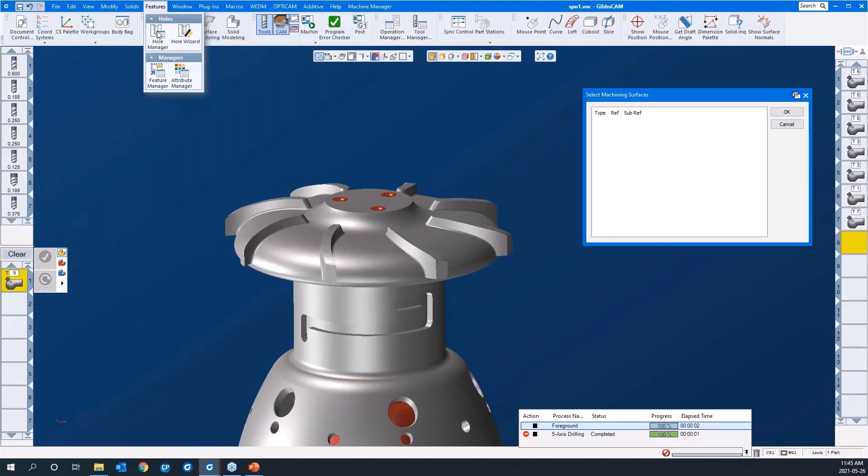But what I've done is I've created a feature that defines the blades. And we'll have a look at that. So I'll open up the process dialog. Under surface paths, we're now deburring my part surfaces. I'll pick them. I'll open up my feature manager and just pick the blades. I'll say okay. Okay, you can exclude edges or check surfaces for fixtures, what have you.

Here's the size of the edge break. I'll drop that to 10 thou. Okay, if tool axis control is vital here, we can just go full 5, which we are. But you can go 4+1, lock a rotary axis or the tilt axis and go. 3+2, as I was mentioning, for 5-axis positional milling. You can do it on a 4-axis mill or just straight 3-axis, if you only had a machine with no rotary axes. Okay, we're going full 5 here. It's as simple as that, really.

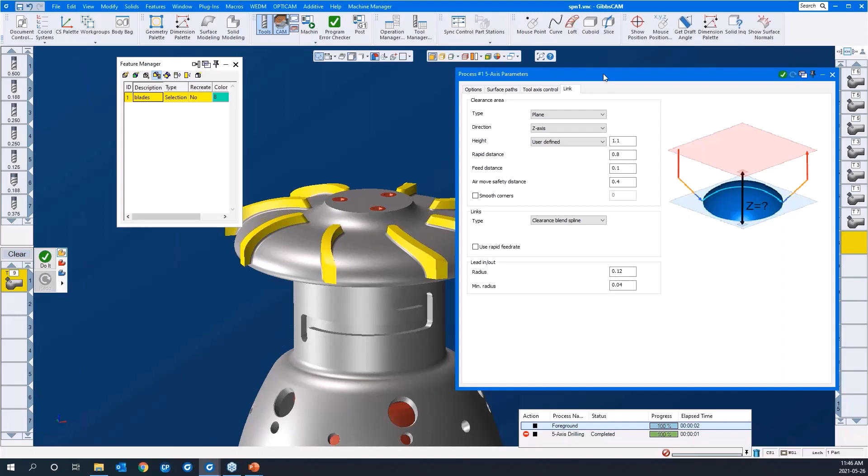Okay, one thing we're going to use, and it's available across the board, is this clearance blend spline. Rather than an abrupt lift and over and then back down, it actually creates a nice curved reposition move, and you'll have a look at that here. I'll say do it. Give it a moment to calculate. While it's calculating, GibbsCAM is multi-threaded. It allows you to continue on. I could develop new toolpaths. I can solid model, create a tool, what have you.

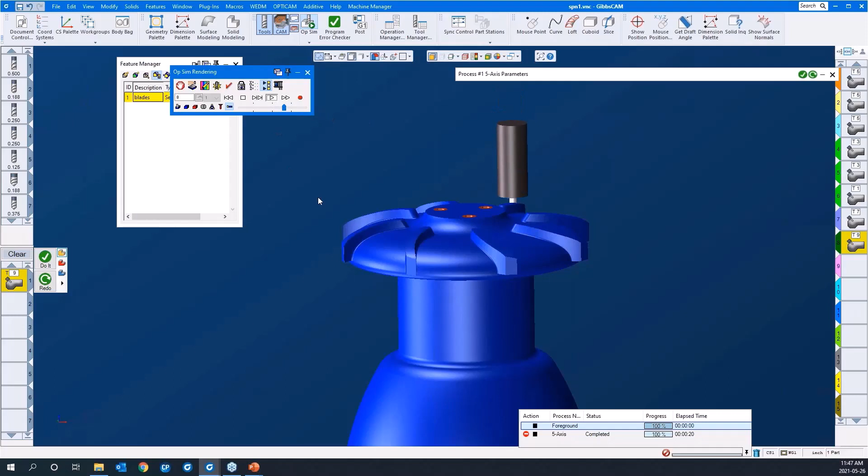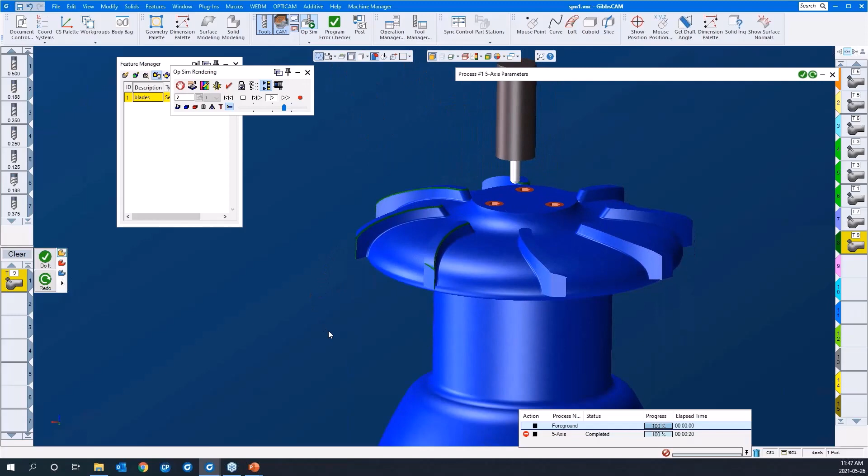I'll go back to OpSim here. But you can see those, and I'll make sure that we are, yeah, fixed part like that. And hit play. So as it cuts down the walls, it actually tilts the tool away. You'll have a look at that. So it's automatic deburring cycles, and then you just exclude what you don't want. Very powerful. And here's the clearance blend spline moves, okay? And again, nice soft repositioning moves, easier on your machine.

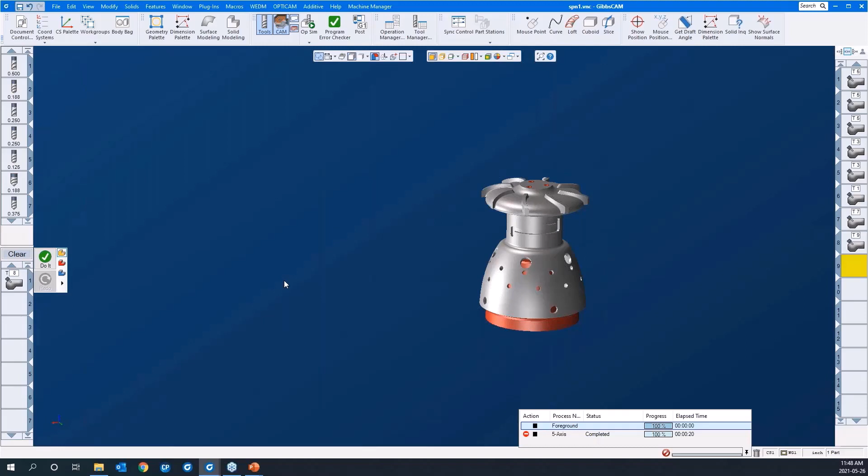We have one more toolpath we're gonna look at, and we're gonna wrap it up here. It's basically just a straight 3-axis finishing strategy. I'll load it from the process list here. It's called geodesic machining. You guys may have heard about this, but it makes just high quality toolpath options. Let's have a look at this. Under surface paths, it'll be geodesic machining. What that means is that it puts a geodesic mesh over any surfaces you select and then machines that geodesic surface. That's similar to triangle mesh, but the quality of the toolpath is just fantastic.

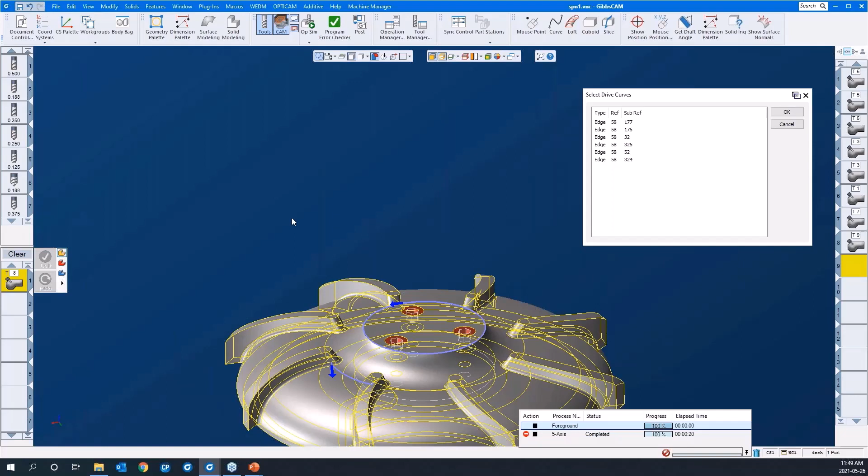Okay, so we never did focus on that surface there. I'll go drive curves. I'll pick this upper edge and the lower edge here. Okay, you can see that it didn't behave the way I wanted. So what I can do is just right click here and go 2D chain rather, and double click on this edge again. And you can see it now chained it up the way I wanted. I'll include that one as well. Say okay.

Okay, we're going to spiral up or down based on whether we have flip step over on or off. If we are spiraling, you typically want to do a full pass or full contour at one depth at the beginning and end, and we'll continue with that. Here's your step over amount, by step over or by ridge height. Tool axis control: in this case, we said 3-axis, gouge check only where required. Let's create the toolpath.

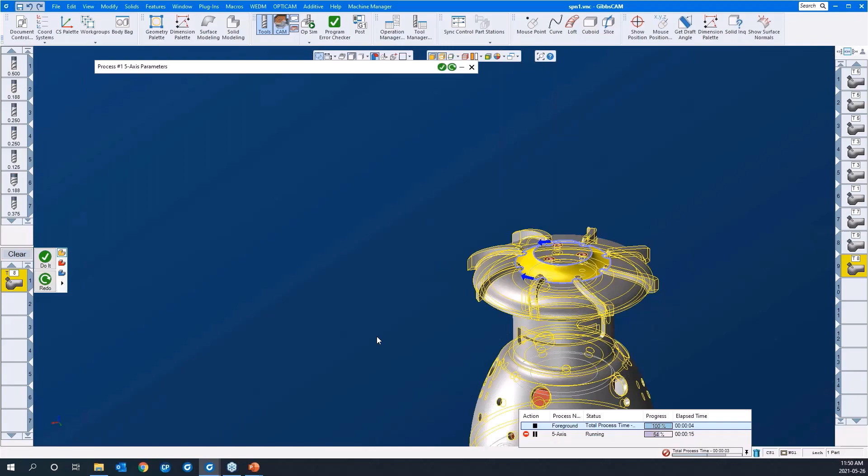I'll give it a moment or two to calculate, but very robust toolpath, very quick to calculate, very high quality. Something like that. Let that run. Something like that.

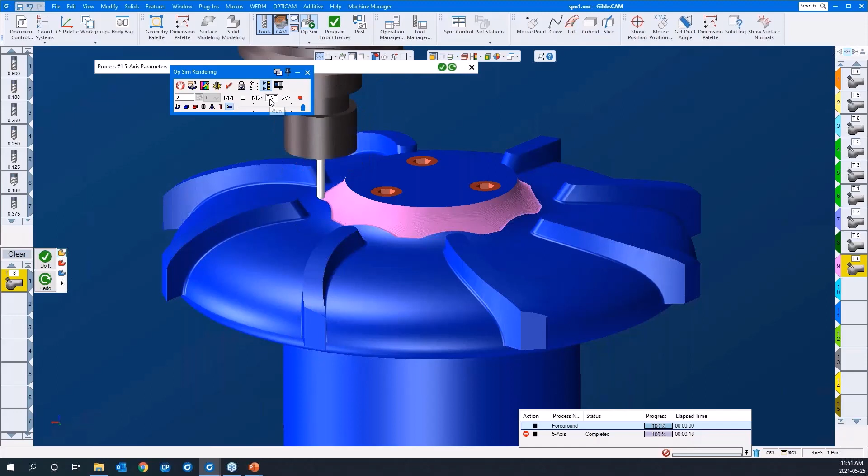So that's where we're going to end it off today, guys. As you can see, the 5-axis module in GibbsCAM is very powerful and easy to use. We used 5-axis strategies. We went to 4-axis. We went to 3-axis. Hopefully we showed you a lot in a short period of time. There's much more to it. This was only the tip of the iceberg. There's a lot left to certainly display.